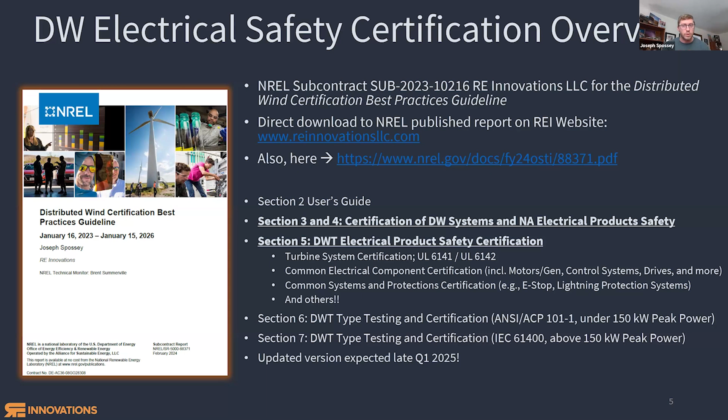and below 150 kilowatts. The stuff I'm going to talk about today is covered in much more detail in the Distributed Wind certification guide, so I encourage you to download it. It's a key tool for planning and preparing for the CIP. Everything I'm going to talk about today is in more detail on the guideline. There are checklists and tables and things that'll show you what's applicable for your given component and in much more detail than what we're going to talk about here.

So what drives us to comply? Why in North America? Why do we have to certify? I get asked that question all the time. It really is baseline quality, international standards for certain products, and it is really just establishing the initial baseline for a quality product, quality wind turbine, but also for mitigation of certain risks. Certainly on the electrical safety side, electrical safety certification is for risk mitigation of shock, fire, and hazard. So that is exactly what it's for.

But also electrical certainly comes into play in permitting and zoning. Electrical permitting, you're going to see, we're going to talk about that. We're going to talk about maps and enforcement. And then same with locally with grid operators and local municipalities, again with adoption and utility enforcement requirements.

But it is also important for export markets. You heard it also mentioned, IEC and other markets in Europe, the machinery directive. There are other markets that require certifications as well. So if you want to market the product outside the US, it's also to your advantage.

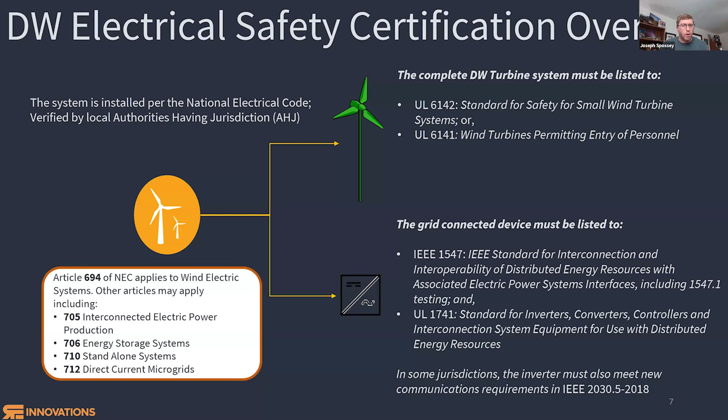First, let's touch on National Electric Code briefly. Again, not a lot has changed. Still Article 694. All components still shall be listed and labeled. Still references 61, 41, and 61, 42, and still applies to all the major components, surge protecting devices, wiring methods, and raceways.

Basically what I've done, and I encourage you to also do on your own, is check up on the maps. I checked this map, and this is updated since previous. The main thing I'll note related to adoption is now 37 states have adopted 2020 NEC or newer, up 6 from last time we had this conversation. This is important because 2020 code is the version of Article 694 that first brought in 6141 and 6142 and listing of the electrical system. So those you see there in purple and white are the states where you're going to start to see the latest set of requirements being implemented by local authorities.

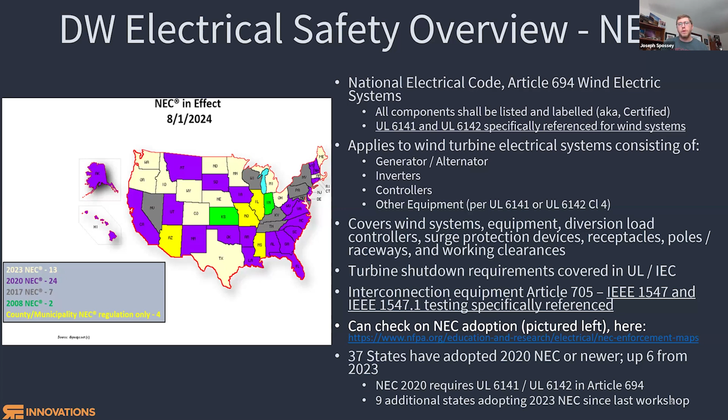Before I really dive into the different certifications for the components, I do like to talk a little bit about some terminology for certification, common terms. A wind turbine system is a classification listing, is what that's commonly referred to, and that's what will be applicable for any wind turbine system being certified.

People always ask me, what is a listing? A listing is literally just a public listing of a certificate or certification records and documents. That listing is usually done by a third-party accredited, nationally recognized testing laboratory, NRTL. In North America, that's all maintained by OSHA. They audit, they accredit, and maintain the laboratory accreditations directly with the labs. You can find all those labs on the OSHA website and all of their scopes, so it's easy to find who can do what.

So a classification listing is used for a grouping of components or subassemblies. You've got an inverter here, a generator there, a controller - you've got pieces and parts, and as a system, they have an applicable standard, 6141 or 6142. That's a classification listing.

Other than that, at the component level, there's just a listing, or a recognition listing, or a recognized component - that's at the component level, subassembly, and also subcomponents. A listing is full compliance with the product standard, A to Z. A good example of this is an inverter. There's no conditions of acceptability. That falls under a recognition or a recognized listing or a recognized component.

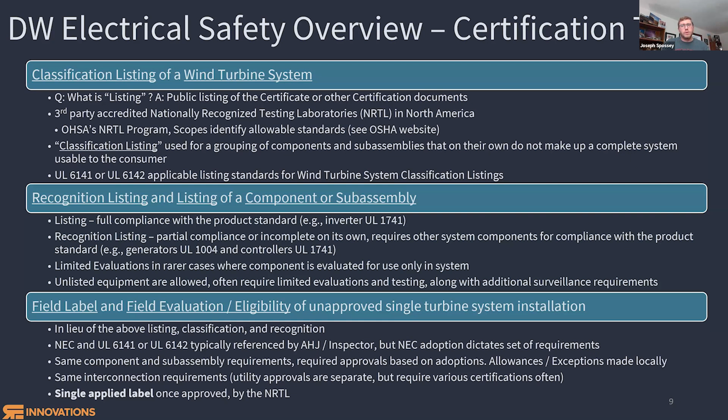Okay, 6141, 6142, turbine system classification certifications. This slide is really just to show the similarities between the two. In my opinion, the two could be the same document. They don't need to exist separately, but they do.

The major difference being 6142 for small turbines is where users or service personnel cannot or are not intended to enter the turbine in any place. And 6141 being the opposite - service personnel enter the turbine either in the tower base or in the nacelle or both to perform maintenance or service. So that's the fundamental difference between the two documents. Other than that, the requirements are pretty much the same.

6141 does have some other standard references in them. For example, switchgear and transformers in larger turbines are operated at higher voltages, so there are some other standards referenced for those higher voltage values. But aside from that, the requirements are pretty much the same. The other big difference is that in 6142 you're going to find all the requirements for turbines that are intended to be utility connected, interconnected.

That's not in 6141, mainly because that's large turbines, not one-off installations, wind farms, things like that. If you're a larger turbine that has entry, but you are being used in an application with utility grid interaction, like a distributed wind application, behind the meter application, then you have to comply with the utility grid interaction requirements of 6142, even though you're a 6141 turbine. So it depends on the application as to what sort of grid interconnection requirements you have to comply with. And then 6141 also has service personnel requirements in it.

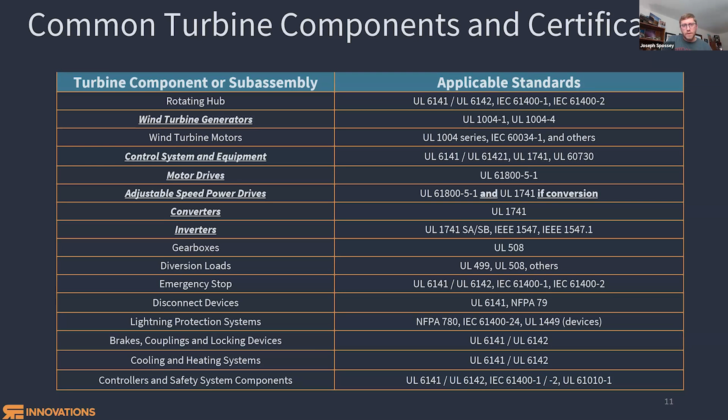I'm not going to read all of this. I couldn't possibly have enough time to do so. So we'll hit a couple of the high points, but I like to flood this slide with some useful information. Again, you can refer back to this at a later date.

For alternators, generators, and motors, you really just need to be prepared and know what you have before you walk into the certification process. And then it's fairly simple.

Most commonly, the biggest piece of information I always give is related to the insulation system. It has to be UL 1446 listed as a system of components. That means you can't grab, even if they're made by the same company, this part, this part, this part, all certified individually. If they're not certified as a group of components, as a system, then they are not UL 1446 certified.

And that could be a potentially longer road for you. But the most important piece of information in the UL 1004 approval process for a generator is the temperature test. I talk about this in the guideline. There are some exceptions. Basically, if your windings never exceed 105 degrees C - I have 100 here, that's a Canadian requirement - in the windings, then you have what's called a Class A insulation system, the lowest level, and you afford yourself some exceptions along the way, and it makes it easier. You don't have to worry about having a UL 1446 certified insulation system. So that's about just the planning element, knowing what you have and what you need and what your temperatures are before you come into the certification.

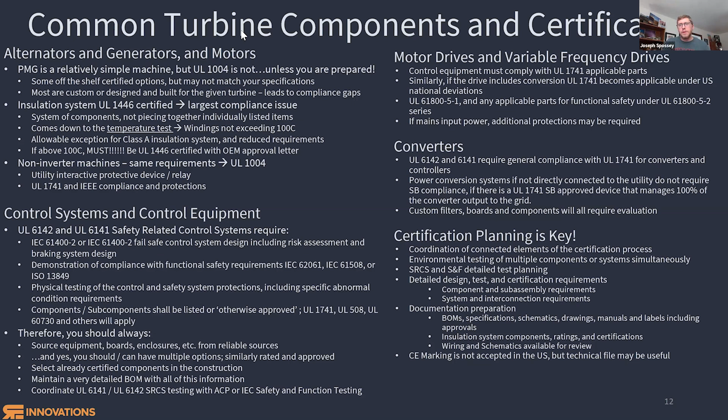On the inverter side, Brent, how are we doing for time? I've only got a few more slides. We should be okay. Fine, Joe, you're doing fine.

Should be good. Inverter listing is, generically these days, the latest and greatest UL 1741 SB, supplement B, is what's being enforced. UL 1741 is what's generically required in both 6141 and 6142 for inverters, converters, and controllers. It's not dated, doesn't say a certain version, but usually that means you use the latest and greatest reference when applied. So an NRTL would probably agree with that and would just go to the latest supplement B version of the document. But that doesn't mean you're being applied supplement B automatically - that just means you're using the latest version of the standard.

Clauses 1 through 71 can be applied to many electrical components and equipment - general electrical safety and performance, ratings and markings requirements that are broadly applied and don't necessarily apply only to inverters. That can be applied to converters, controller equipment, etc. Beyond clause 71, that's where you get application specific charge controllers, PV equipment. You get into supplement A and supplement B, and that's where the utility interactive devices come into play.

So it comes down to the dated versions of 1741 and IEEE 1547, or supplement A, supplement B, that will dictate compliance in a given jurisdiction. We'll cover that in the map, I believe it's on the next slide. It is important to note that there are options or different paths regarding compliance in 1741, and I believe this to be an SB specific thing.

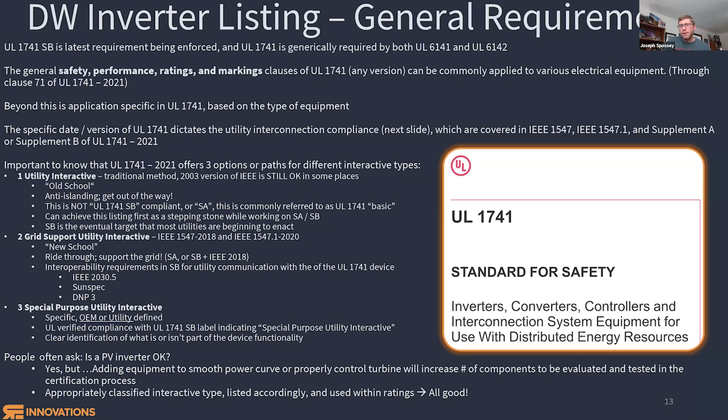Maybe you're tricking it in the program to do something a little different. So those gaps are always addressed whenever you use a product in a different application. But nothing wrong with the inverter. Sometimes the old Windy Boy or whatever had that other box, the rectifier box, and that's common. There's some other box there that wasn't ever listed, right? That box now adds to the cost of the certification, adds to the complexity.

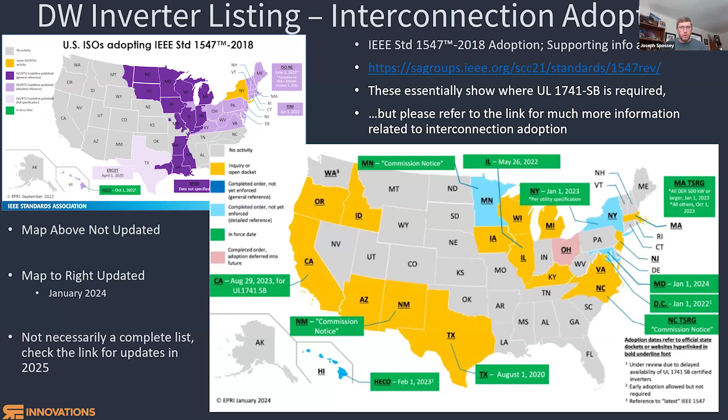Okay, all that. Why CIP? We've seen the updated numbers, the awards over the years, the moving towards funding electrical, right? So let's see some of the different areas where we can cover this under the CIP.

The prototype manufacture and installation, not usually electrical in scope. Prototype install and testing, also not usually. That's primarily used for getting ready to do the ACP 101 or IEC testing, but may have some electrical tests in there during the installation for commissioning or things like that.

Component innovation, system optimization, I think, are two prime candidates always for electrical related scopes. Component innovation, right? You could already be having a listed inverter component that needs to be optimized, improved, something changed, right? That's a prime candidate for component innovation. System optimization, maybe, I think I heard Ian say, that would be more like you've got a system of components that needs to work its way towards the certification. So obviously you're swapping out a whole bunch of things, right? Or even maybe some of them are certified, but you have a system of electrical components inside the nacelle or whatever that all need to be evaluated and optimized towards a certification. That could be handled there as well.

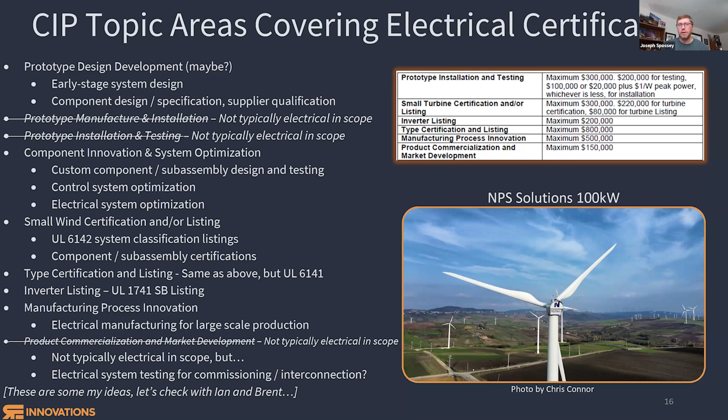Again, these are all just some of my ideas. Check with Brent, check with Ian, right? Here's, try to put some estimates on time and cost.

First on cost, on the right-hand side - I'm running short on time, almost done. The inverter number should probably really be about 50% of the cost, so let me update that. The other things will shrink down. Then you can go back to that table above, that 200K number for the inverter, and start putting in numbers that make sense for some cost estimates.

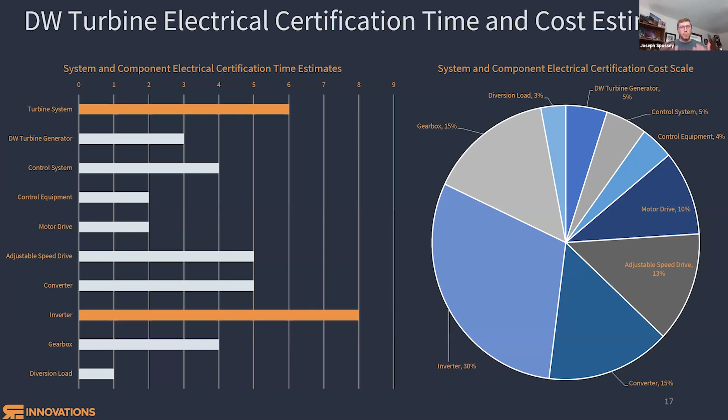On the left-hand side, the time estimate for the turbine system doesn't include the inverter, but it does assume you've got to do a couple of these things along the way. With that, you should still be able to reach about a 6-month time frame, if not sooner. If you're also making the inverter, add that to your time frame, but usually you're getting that from someone else, procuring it off the shelf, or having them go through the listing process.

Right, and that was it - I think we went through everything. Just a couple minutes ahead here. If you guys have any questions on the certification, the topic areas, the costs, timelines, any of it, you can ask me now or reach out. Happy to partner and help in these projects as well.

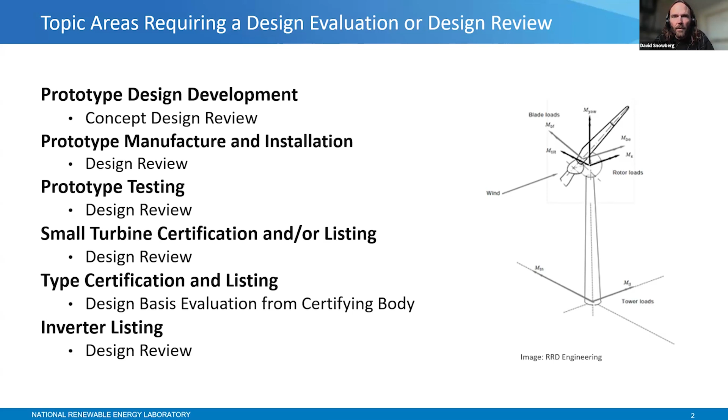So: prototype design development, prototype manufacture and installation, prototype testing, small turbine certification and listing, type certification and inverter listing. These are the different CIPs that have these design reviews.

A big part of all design reviews for any of those topic areas starts with loads. Having a good understanding of your loads is a very important first step to understand your system, how it's behaving, and through modeling that, to take those loads and do analysis and develop designs around them. Of course, depending on whether it's a prototype or type certification, the load development would be at a different level of maturity.

Safety factors are applied to loads, coming from standards like ACP 101, the IEC standards, or others. Refer to the relevant standard to come up with both your load cases and your safety factors, as well as blade test requirements. That's an important part of the certification process for distributed wind. Depending on size, it will be required, and depending on where you're at in development, you may just be making plans for it or may already have it completed.

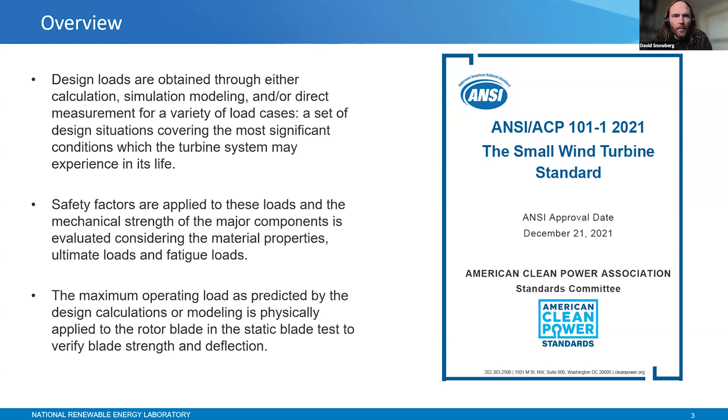Now I'll go into each of those topic areas, one slide each. For anyone listening, if you're awarded a subcontract through CIP in the future, we at NREL would provide you with guidance and templates for what the expectations are for a design review. So you don't need to be frantically jotting down notes on all these slides, but I just wanted to provide an overview to help understand the expectations.

For prototype design development, this is the earliest stage of product development under CIP. The design review here primarily involves NREL subject matter experts, potentially other DOE national labs, and potentially DOE participation as well. At the concept design evaluation for the prototype level, we'd look for load estimations through the technical concepts being developed, performance estimations, cost, and responses to the opinions of the design reviewers. The intent of this evaluation is to ensure you're ready to progress to producing a prototype that's potentially technically and commercially viable.

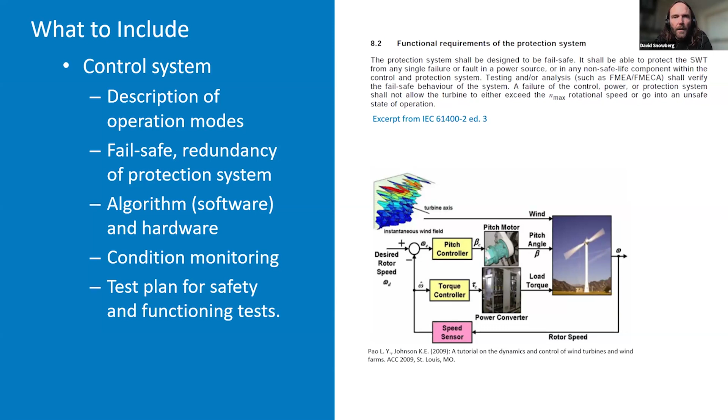But with any wind turbine system, there's some key things that are always going to be there. Loads, for example, and control systems. Wind turbines need to have robust control systems to survive what we put them through in their environment. So description of the control system, having an eye towards fail-safe redundancies within the control system is important. There may be some condition monitoring depending on the type of turbine that you're developing, and certainly have a test plan for safety and function tests for your turbine. So that's one aspect that should be included in a design review.

Also consider the design load cases. Within IEC 61400-2, there's 3 different ways loads can be determined. Simplified load method, which is only recommended for the smaller side of turbines that fit under this scope. Aeroelastic simulations, that's probably the most common way of coming up with your loads, whether that be OpenFAST, Bladed, or other aeroelastic modeling tools that can help you develop those models and loads. Or full-scale load measurements, that's another way under the IEC. That's not always included under other standards, but that's one way you can come up with your loads.

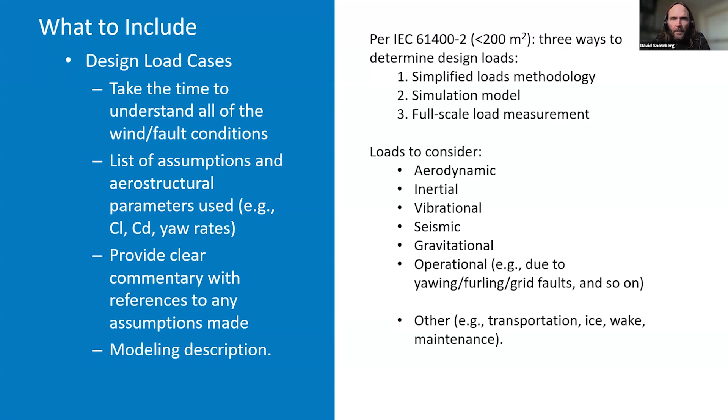And many different loads to consider. Again, refer to the standards, but aerodynamic loads, inertial, vibration, seismic, gravitational, operational loads. Transportation can be an important load as well, depending on how machines and equipment is transported. Also consider loads of installing your turbine for tilt-up towers, so make sure those loads are sufficiently modeled and acceptable. It's important to do all this, and this is part of what we would look for in a design review - your approach to coming up with your loads and then what you do with them.

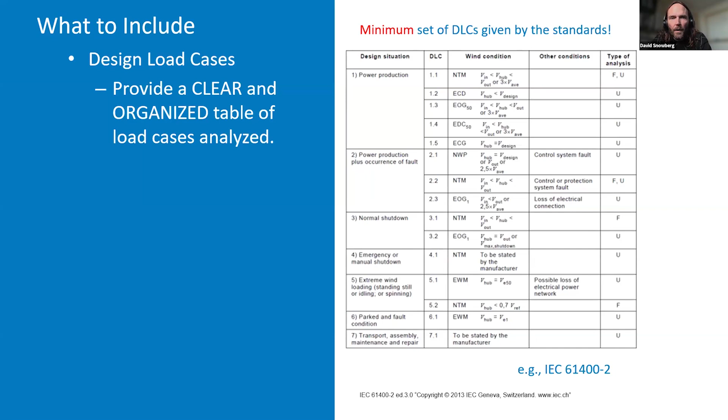So minimum set of design load cases here, shown from this table from -2. This is... -1 has a similar table for load cases for larger turbines. But it's important to comprehensively look at your loads from your modeling effort or other ways of coming up with loads, and then present them in a clear and organized way.

When you're looking at design load cases and analysis, it's important to look at all the relevant components of interest - certainly tower, blades, your shafts, and other components will be key parts to analyzing, coming up with your loads and analyzing them. It's important to look at all the different load cases, because sometimes you might be surprised at a certain load case coming up with a higher load than you were expecting for that component. So it's good to be comprehensive in your approach here.

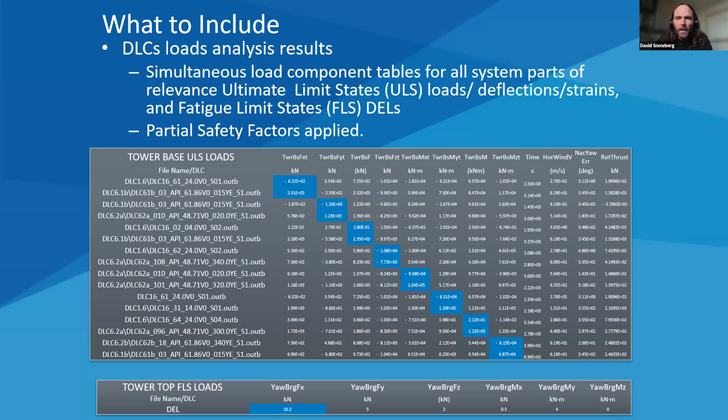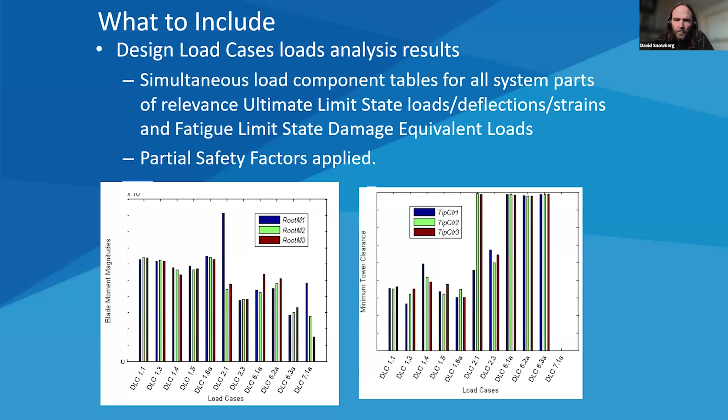But it's important to look at all your load cases and then apply the safety factors per the standard. You want to be looking at your ultimate limit states, your fatigue limit states, and other limit states that may be called out in the standard. When it comes to limit states, it shall be verified the limit states are not exceeded - it must be coming from one of our standards, which is what the analysis step should be doing, where you're taking your loads, doing your analysis, applying the proper factors on your loads, the proper factors on your materials, and ensuring that you have adequate margins between the two.

So within that, also want to be looking at a modal assessment, ensuring you don't have any resonance that could cause you challenges. Good to mitigate those early, not discover that you have a resonant problem after you've already committed to tooling and production and such. Campbell diagrams can help with that process to help identify some of those vibrations and frequencies to avoid, and include all the components of relevance.

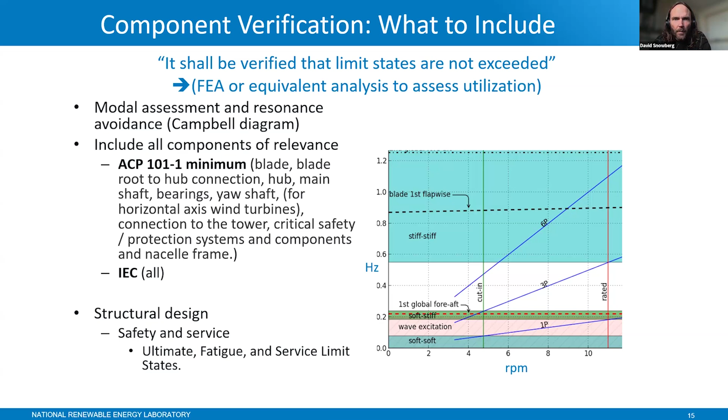So within ACP 101, that calls out the blade root to hub connection, hub, main shaft bearings, yaw shaft, and IEC calls out all components. And again, ultimate, fatigue, and service limit states are the limit states to be looking at for all these different components. So pretty comprehensive, but it's important and valuable to do that early on in your development.

So for all components of relevance, these are some of the items to include: eigenanalysis, finite element analysis, explanation of your boundary conditions, your loads, your material properties, safety factors, your manufacturing process, quality assurance, quality control protocols, and then of course all your standards that you're working towards. And again, calling out the static load test that's required for the blade, the rotor blade, which is only for larger than 1 kilowatt turbines from ACP 101.

It's understood that if you're developing a prototype, potentially you just have plans for that blade test at this design review step when you're still developing your prototype, but it should be something you're thinking about.

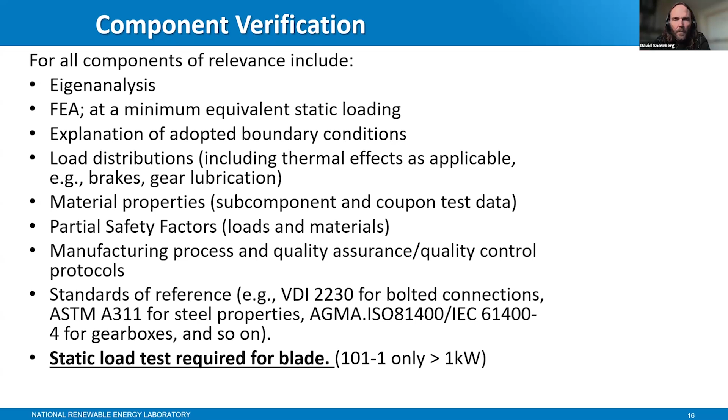For these design reviews, we ask you to summarize in a PowerPoint presentation so that folks can be in a room, either virtual or in person, and work through the design review to provide feedback and have a productive discussion.

Some key takeaways here: this presentation is not meant to be exhaustive on everything required, but it does provide quite a few details on what expectations would be for a design review. First step, read and understand the standards, or hire somebody who does, because that's going to be key to your success through CIP.

We want you to be scientifically rigorous, showing that the decisions you made were based on data and good reasons. Pay attention to documentation format, version control, figure numbering. Keep it clean and easy to understand and reference, not a mess to read - that won't help reviewers in their understanding of what you're doing.

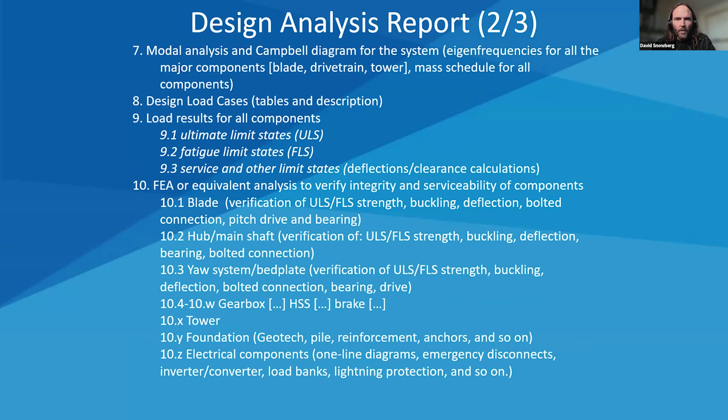Won't read all this, but get an idea of the information here: describing the system, the control and protection system, your approach to modeling, some analysis results from the modal Campbell diagram, all your design load cases, your FEA or other analysis methods and results for key components, your operating and maintenance provisions, transportation, installation, manufacturing, safety, function, and conclusions.

And then appendices covering installation instructions, other potential operating and maintenance instructions, cable connections, and tower options. So that is one of the templates for a design review.

And with that is the end of this overview. I'd be happy to answer any questions, as well as Brent, I'm sure.

Well, excellent, Dave, thank you so much, that was a good overview. Like Dave said, it's actually a great opportunity for you to get your design file together, because I know you're headed toward certification and you can't start thinking about these things too early.

And also you get some face time with experts at the lab, and some candid feedback and questions, which will help you uncover opportunities to look further into your design, improve your design, and improve your documentation. So any questions for Dave on design reviews or design evaluations?

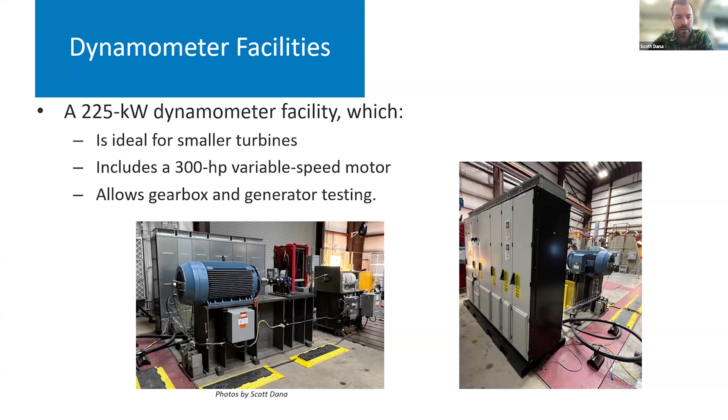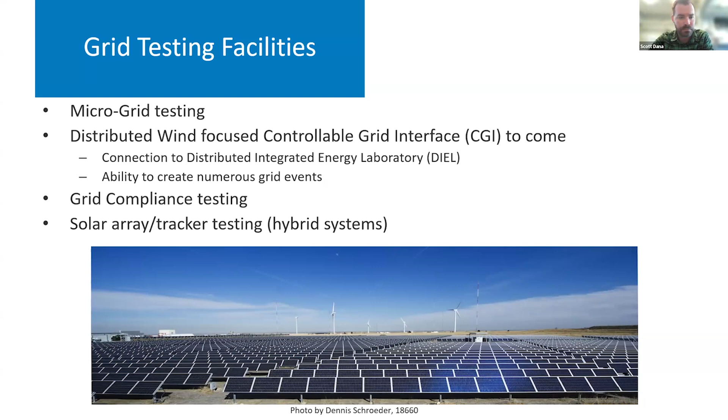So that's another thing to keep in mind. We have in the past been able to come to your turbine, your site, and help with instrumentation and calibration efforts, leading into maybe prototype testing or certification style testing, where some of those things are not so trivial and there's not a lot of available public domain knowledge. So we've been able to support some of that. Keep it in mind - if we know it's coming, that's better, but it doesn't necessarily need to be the case. We certainly have a lot of expertise in that space.

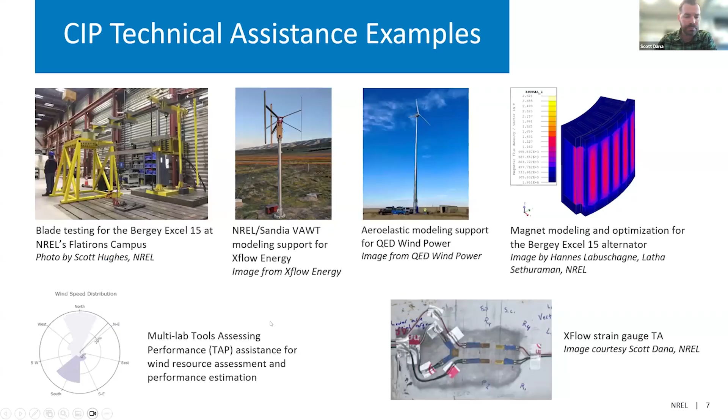Tim Olson asks, could you describe those three business tools more, or show examples, provide links - TAP, dGen, HOMER? Sure, let's see. I'll give it a shot on the tools assessing performance. That's a project that's been going for a while. It's evolved into a tool called WindWatts, which you can search for - I'll try to put a link in after this. It's a project where we've offered some technical support on wind resource assessment, essentially, and performance prediction tools.

And dGen - there's a part of dGen called dWind, which is an analysis group project using GIS, geographic information systems tools, to overlay lots of layers of information from wind resource to county data, and provide some analysis of state, county, local level market potential. So that relates to that NREL future study - the distributed wind future study is sort of a culmination of a large study using that diffusion model.

And then we do have quite a few folks working on hybrid system optimization, HOMER and dHOMER, and some other tools not listed here that you may be interested in. I think most of them will be listed on the NREL distributed wind research page, which I'll drop in, and there'll be links to TAP and some of these other programs on that NREL distributed wind website. And Ian dropped in a WindWatts beta version link that evolved from the TAP project. So hopefully that helps, Tim.

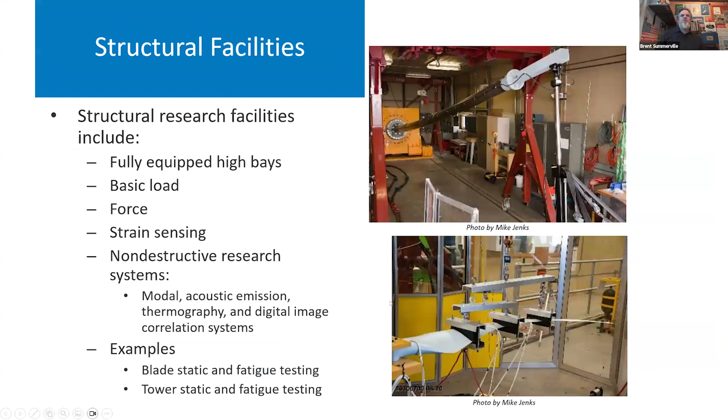As Kendall showed, these subcontracts are deliverable based. We negotiate a deliverable payment schedule and pre-negotiated values for these deliverables, so you submit them, they're reviewed and approved. You submit an invoice and you're paid for the deliverables throughout the period of performance. All of these projects have had a common first deliverable, which is a summary of work effort describing the project.

It's the first thing to work on. Then all projects have quarterly reports that come in to keep the technical monitor abreast of project progress. And then there are deliverables specific to the topic area.

When the RFP is released, there is an accompanying statement of work which describes in detail the tasks for each topic area and the associated deliverables for each of the topic areas.

I will state that there is some flexibility in the deliverable schedule. For instance, a big complex deliverable can be broken up into multiple parts, providing opportunities for payments to come in more than one chunk and to spread the work over a longer period of time. So that's part of the subcontract negotiation phase - producing a custom deliverable schedule that follows the statement of work from the RFP, but also allows you to negotiate some slight changes and modifications to these topic area specific deliverables.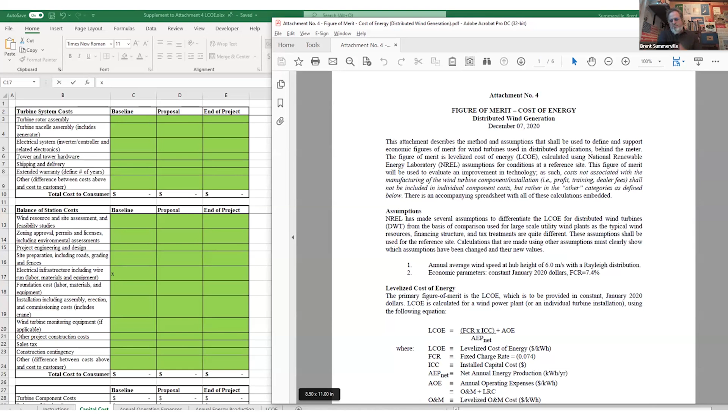Also part of the RFP is a levelized cost of energy tool - a spreadsheet and accompanying instruction page that is useful in the proposal stage, and you'll pick it up again at the end of the project. LCOE has been a very popular metric for determining the competitiveness of the product in the effort for the intended market.

You're probably familiar with levelized cost of energy, but it's all the dollars divided by all the kilowatt hours. On the top, there's the capital installed cost of the turbine to the customer. The tool has a fixed charge rate provided, and then there's also on top of the equation the annual operating expenses, including O&M costs and any planned component replacement costs throughout the duration of the life of the turbine. On the bottom is the annual energy production, and so the result is a dollars per kilowatt hour estimate.

The calculator has 3 columns. Not all topic areas are LCOE focused, but some are, and therefore we want to track your baseline cost of energy, the proposed goal of a new updated cost of energy following the completion of the effort in the project, and then we reserve that third column, end of project, to complete the tool and estimate the actual cost of energy that was achieved at the end of the project. So baseline is current cost now, proposed is what you expect at the end of the effort, and end of project is not filled out until the end of the project. So you may have 25 cents per kilowatt hour now.

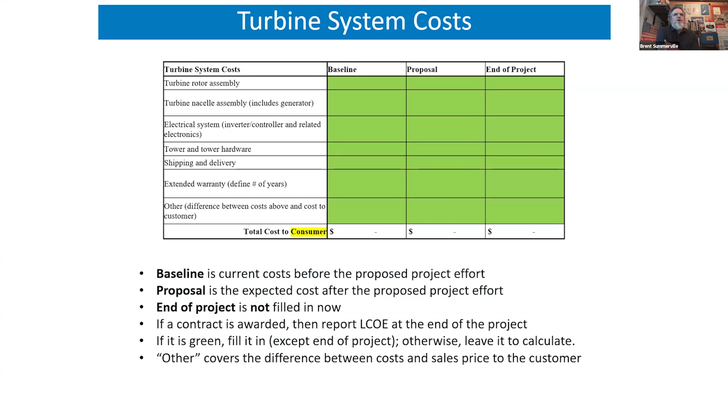On the initial capital cost balance of system, you basically include everything expected in a normal installation as described in the tool, showing your current baseline costs and then expected improvements in the proposal column. In the proposal, you justify the improvements to be made there.

Even if your cost of some components increases, perhaps the effect of the project is to increase performance. Therefore, you can still have a lower LCOE because of the increased kilowatt hours in that equation. Be realistic in the installed cost as much as possible, because it's compared to realistic installed cost that's available to the labs and can be reviewed in things like the distributed wind market report.

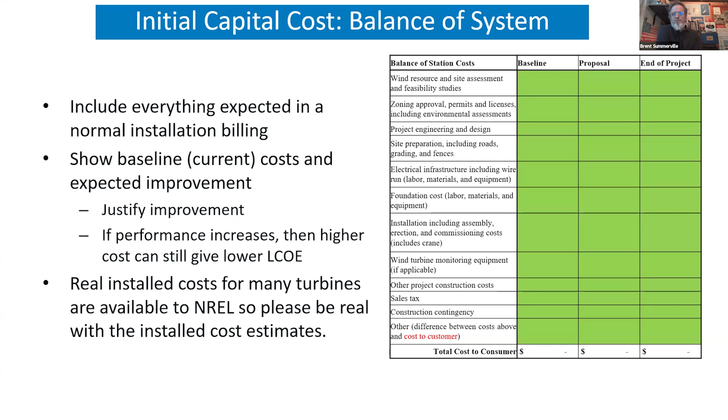There's a tool for calculating estimated annual production. You provide your turbine power curve at a given hub height, and like most tools like this, it does some wind shearing if needed between wind speed and hub height. You can include some losses and availability, soiling, controls, grid, and other losses, just as you see in any other power estimation calculator.

Again, don't fill out the end of project column—that's for the end of the project. And please, please do not exceed the Betz limit. That's a red flag on calculations that seem to defy the laws of physics.

So O&M costs are in there. You try to be realistic on operations and maintenance costs. If the manual calls for annual maintenance, include that cost in there. Don't estimate it to be zero, because surely there'll be some issues that will result in a non-zero operations and maintenance cost. There is a place for replacement costs.

If a replacement for a component is expected in X amount of years, that expense goes in the replacement cost part of the tool. Anything expected to be replaced periodically throughout the turbine design life, but not consumables such as brake pads and oil, is levelized by the tool across the span of the project. You just enter the cost and the mean time for replacement in the spreadsheet.

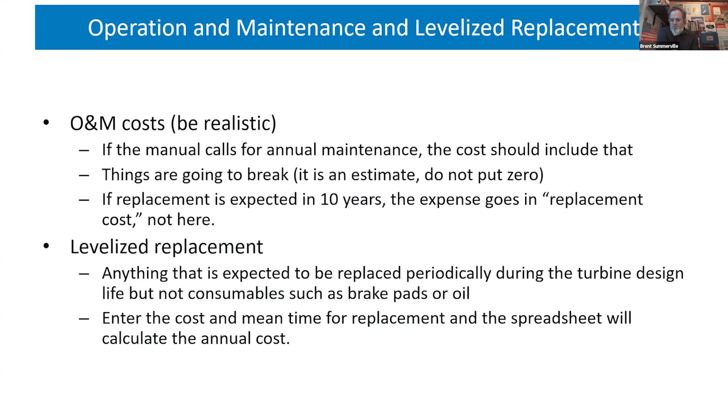Okay, so that's it for the LCOE calculator. People seem to use it okay, and it's a good way to have a common tool for everyone to be using the same spreadsheet and tools for estimating this key LCOE metric.

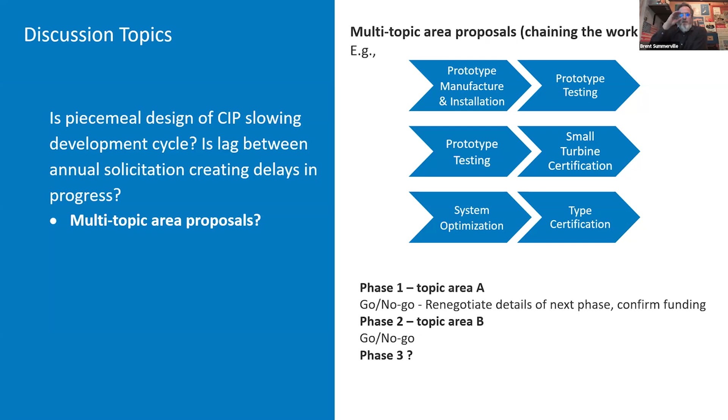You faded out there audio-wise, but I think I got it. So there's some support here on chaining them together, and sounds like you suggested some bundling even before we got to this slide. I don't know if I bundled them right here, but just as an example, we could go from 10 to 4 topic areas - maybe not that drastic, but some of this might make sense as far as combining topic areas into one more broad topic area.

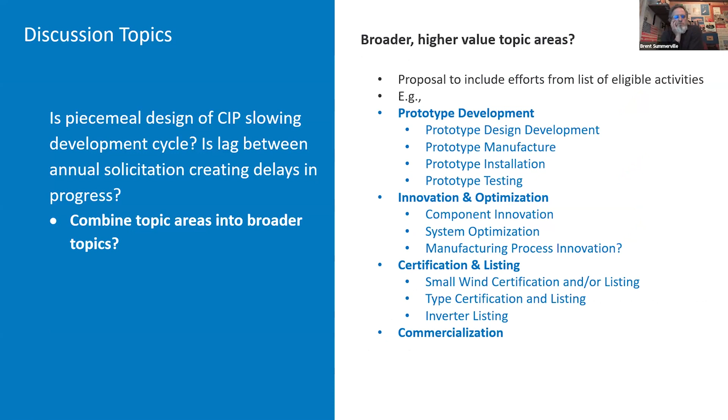I know this is fast, but we're going to move to this one. What about award amounts - are they adequate for the efforts? Are these calculations based on turbine size a little overthought? Should we simplify the award amounts to a maximum and put it on the offerer to propose what they need and justify the cost of the effort, given that some efforts scale significantly with turbine size, such as manufacturing a prototype - a 10 kilowatt costs a lot less to build than a 1 megawatt.

So we want to increase them. I'm seeing the idea of increasing is good - which ones need to be higher? I think yes to everything you said, Brent. Looking back, I think prototype manufacturing and installation is probably too low, and inverter listing might be a little too low too. But some of the others maybe aren't off so far. Any thoughts?

So just to be clear, the reason we did this formulaic approach is because under the current CIP, we do not grade for cost. We have this limit, 200,000, whatever the number is, and you propose what you think it's going to cost, and we don't have you justify the cost.